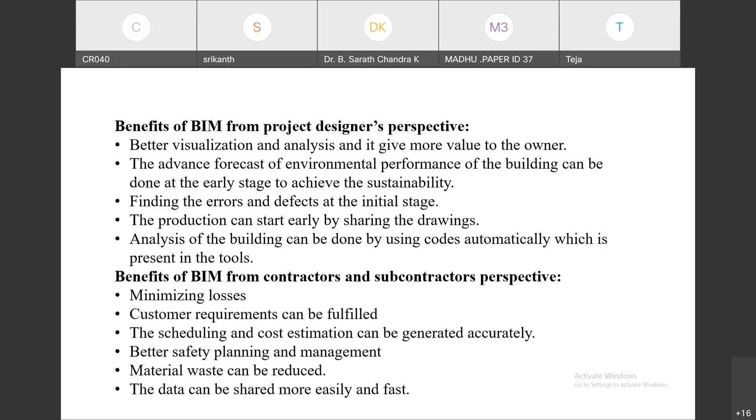Coming to the barriers to implementation of BIM, although there are many, these barriers can change from country to country and also from industry to industry. These are some of the main crucial barriers for the implementation of BIM.

This has been taken from previous literature reviews, and I grouped these into 5 major groups: initial cost, cultural issue, legal issues, lack of skilled persons, and management issues.

Coming to initial cost, there is a high cost of software, high cost of training, and high cost of the implementation process. Coming to cultural issues, there is resistance to change and lack of cooperation between the project elements.

Coming to legal issues, there is a lack of protection for intellectual property rights, lack of BIM standards, and lack of insurance applicable to BIM implementation.

Coming to lack of skilled persons, there is a lack of professional management, negative attitude towards BIM sharing, some misunderstandings about BIM, and a lack of support from the management side.

Coming to the concept of lean construction, the main aim of lean is reducing the waste and giving value to the customer.

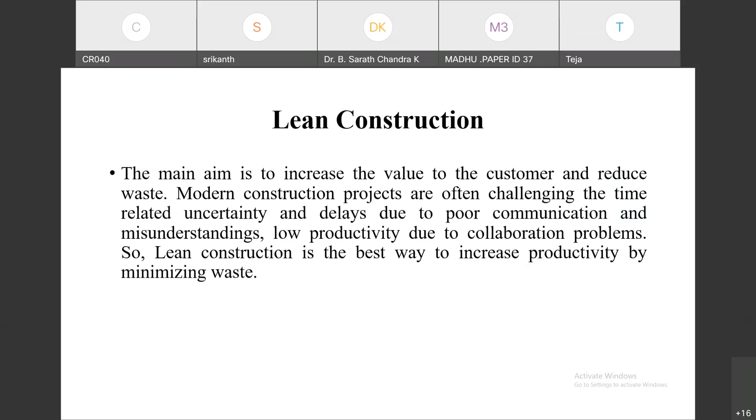In modern construction projects, there are often challenges with time-related uncertainties due to poor communication, misunderstanding, and low productivity, which happen due to collaboration problems. To overcome these collaboration problems, there is a best technique in lean construction called the last planner system.

In the last planner system, we prepare schedules like master schedule, phase schedule, look ahead schedule, weekly schedule, and daily schedule. This last planner system is also called the collaborative planning system, and the schedules are prepared only after all the constraints have been removed.

These commitments are made for when the actual work should be done each day and each week, by various specialists who are selected from the activities that are free from constraints.

Coming to the benefits of the last planner system: it increases workflow reliability, reduces the time of production, increases communication among those involved in the project, and reduces day-to-day problems. It improves the quality of work on the construction site and reduces stress levels.

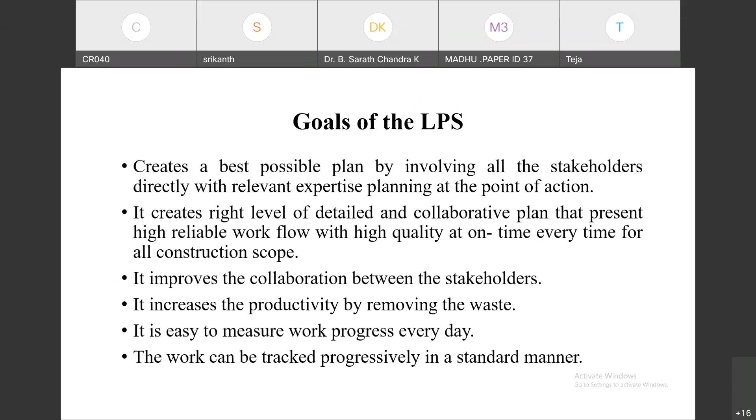Coming to the goals of LPS: it improves collaboration between the stakeholders, increases productivity by removing waste, makes it easy to measure work progress every day by calculating the PPC, and allows work to be tracked progressively in a standard manner.

Coming to the last planner system structural view, this is the structure. Firstly, the project objective has been defined, then we should plan the work. The planning involves phase schedule, look ahead schedule, weekly schedule, and daily schedules.

For every daily schedule, we calculate the PPC, that is the percentage plan completion. If the task has not been achieved, we find the reasons by using 5 why analysis, to determine why the task has not been completed.

This PPC can be calculated using this formula, that is number of completed tasks to the number of assignments. The PPC generally ranges from 0 to 100%. The lower the PPC, the planning should be done weekly. A PPC less than 100% indicates some failure in the production process, but elaborating the reasons for the failure is also important.

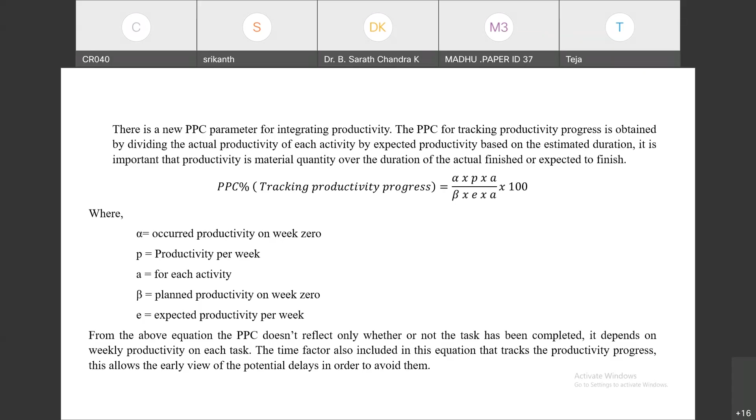Coming to the new parameter of the PPC, it includes productivity tracking. By using this, the PPC will track the productivity daily, by dividing the actual productivity of each activity by the expected productivity based on the estimated duration. This equation does not reflect only whether or not a task has been completed; it depends on the weekly productivity of each task. The time factor is also included, so it tracks productivity progress and allows early view of potential delays in order to avoid them.

When combining BIM and the Last Planner System, it enhances the efficiency of communication among project participants, minimizes project disputes and claims, stabilizes the workflow, reduces construction process variability, reduces limits and barriers from job projects, decreases uncertainty in design and construction phases, and may improve productivity.

Coming to the discussion and conclusion: the main crucial barriers for implementation of BIM are initial cost, cultural issues, legal issues, lack of skilled persons, and management issues. These barriers can be avoided by following certain measures.

Cultural issues can be solved when stakeholders and companies visit real-time implementations of BIM, so that they become willing to do their projects using BIM, by organizing several meetings and active site visits in real time. This gives some knowledge about it, and there is a decrease in the lack of skilled persons.

Legal issues are complex and have a unique response for every project depending upon participant needs. To avoid these copyright issues, the best solution is to set a contract document defining ownership rights and responsibilities. If stakeholders share data with each other and have a positive attitude towards BIM, it may avoid management issues. The main important issue is the initial cost.

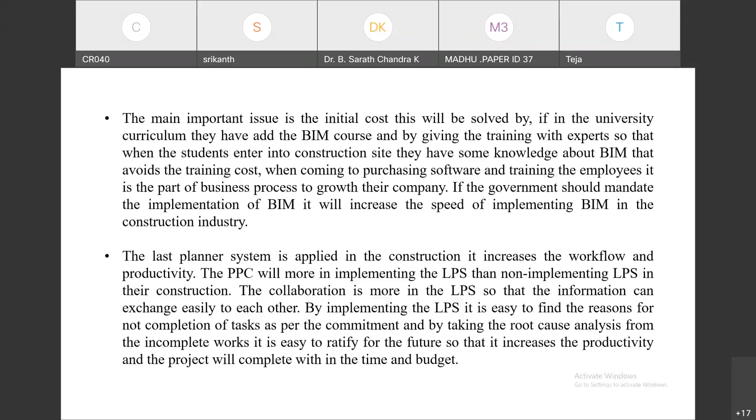By implementing LPS, it is easy to find the reasons for not completing a task as per commitments, by taking root cause analysis. It is easy to rectify for the future, so that it increases productivity and the project is completed within time. These are some of the references which I followed. Thank you.

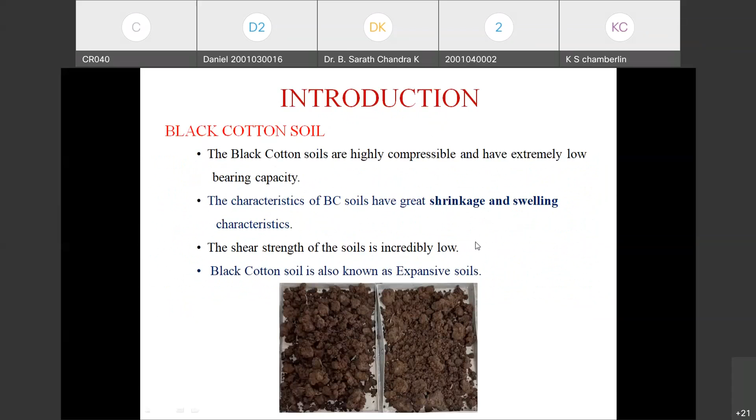This is the introduction about black cotton soil. Black cotton soil is also known as expansive soil. The characteristics of black cotton soil are great shrinkage and swelling characteristics. It has extremely low bearing capacity.

Expansive soils are soils that swell with the addition of water and shrink when dried out. These continuous changes in volume, as settlement, swelling and shrinkage properties, are mainly due to montmorillonite. This process causes serious problems with regard to subsequent performance of the road. Moreover, the soft subgrade has a tendency to heave into the upper layers of the pavement, especially when the subgrade layers consist of stony soil with lots of voids. The physical properties of black cotton soil vary from place to place, and these are some of the black cotton soil properties.

Next one is fly ash. Fly ash has also been used in embankments, pavements and mine fills, and it has increasingly gained acceptance by the Federal Highway Administration. There are two types of fly ash, Class C and Class F.

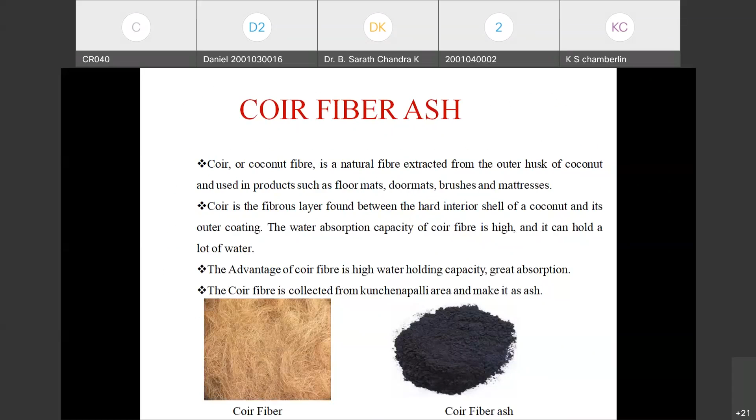Next one is coir fiber ash. Coir fiber is the layer found between the hard internal shell of the coconut and its outer coating. The water absorption capacity of coir fiber is high and it can hold a lot of water. The advantage of coir fiber is high water holding capacity and great absorption. It is collected from near Kunchenapalli area and made into ash.

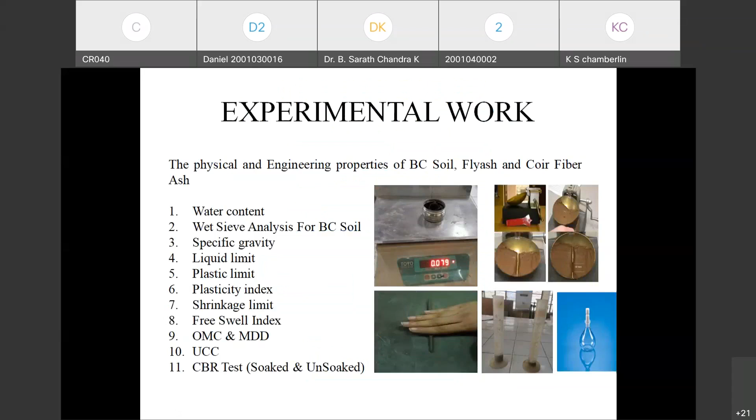First is water content, sieve analysis for BC soil, specific gravity, liquid limit, plastic limit, plasticity index, shrinkage limit, free swell index, OMC and MDD, UCS and CBR test.

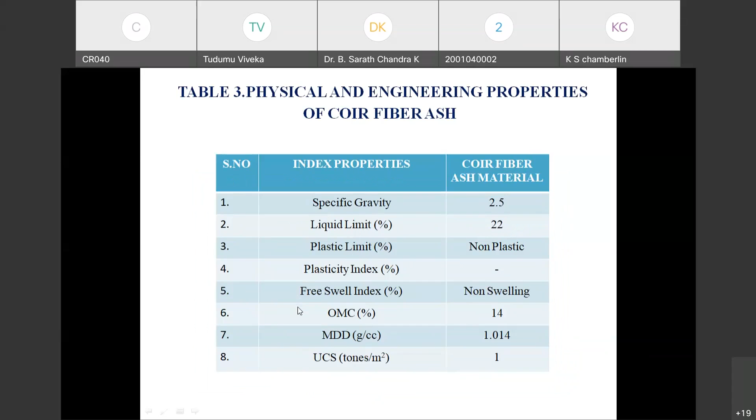And this is the geotechnical properties of the coir fiber ash. Specific gravity is 2.5, liquid limit is 22%, no plastic limit, free swell index is non-swelling, OMC is 14%, MDD is 1.014, UCS is 1 ton per meter square.

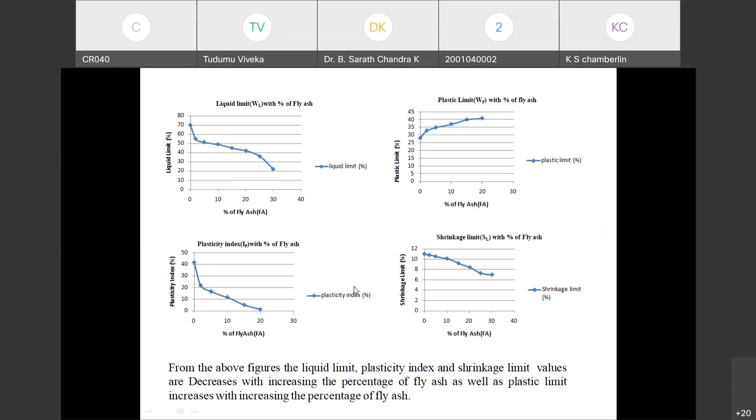These are the graphs from the table. From the above figures, the liquid limit, plasticity index, and shrinkage limit values decrease with increasing percentage of fly ash, while the plastic limit increases with increasing percentage of fly ash.

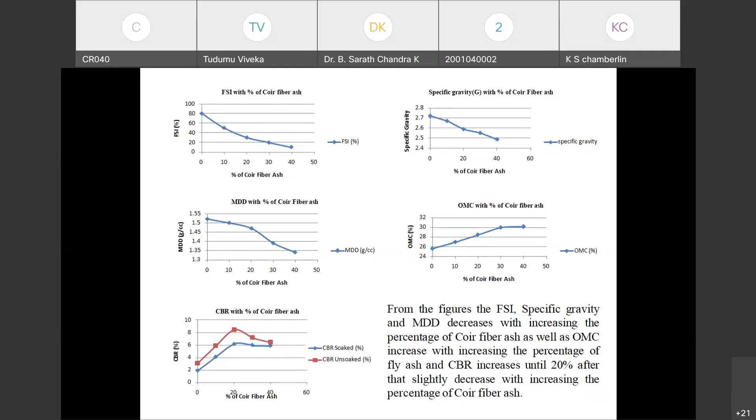From the slide, the FSI, specific gravity, and maximum dry density decrease with increasing percentage of coir fiber ash, while OMC increases with increasing percentage of fly ash, and CBR increases until 20%. After that, it slightly decreases with increasing percentage of the coir fiber ash.

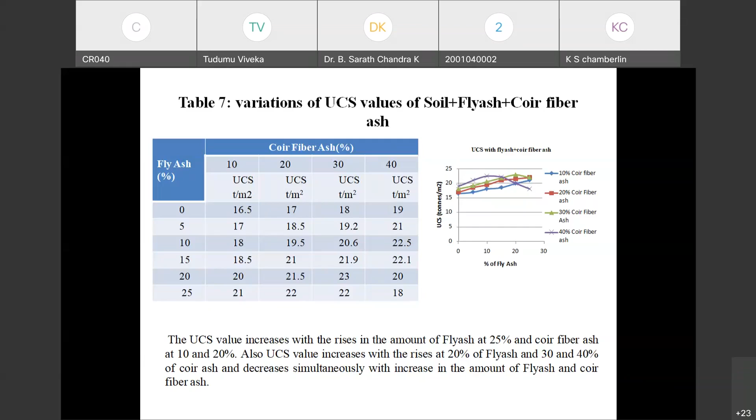Next is the variation of the UCS of the soil plus fly ash plus coir fiber ash with different percentages. From this graph, the UCS value increases with the rise in the amount of fly ash at 25% and coir fiber ash at 10 and 20%. The UCS value increases with a rise at 20% of fly ash and 30 and 40% of coir ash, and it decreases simultaneously with increasing the amount of additives.

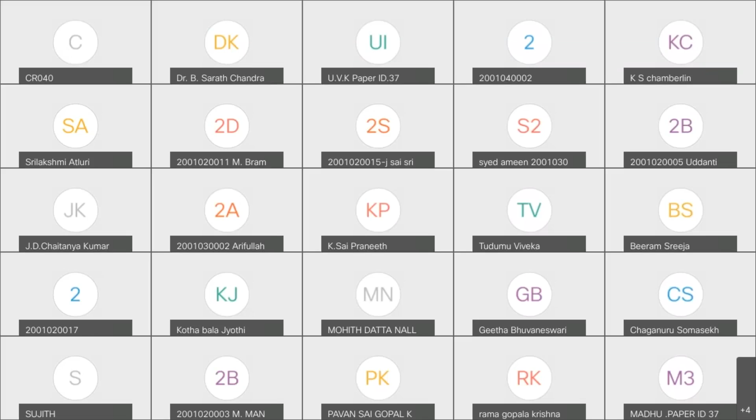Madhu, it's 2:40 now, within 2:45 you have to finish, otherwise it will be difficult for other participants to finish the presentation within the time.

Okay sir, is my screen visible sir? Visible, please continue. Okay sir.

Good afternoon sir. Today my topic is delay analysis of road construction projects from contractors, consultant, and engineers perspective. My name is V. Madhu, and I am doing my project under the guidance of Sri Lakshmi ma'am.

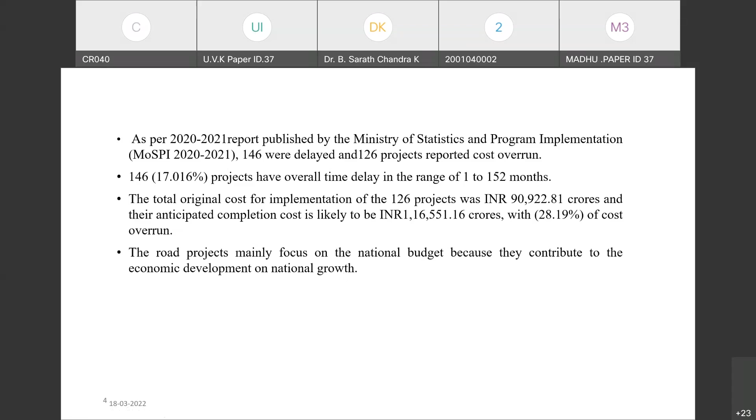So the categorization of delays. Delays are basically classified into 4 types: critical or non-critical, excusable or non-excusable, compensable or non-compensable, and concurrent or non-concurrent delays. So this is the problem statement.

So these are the literature reviews which I had referred.

The main objective of this paper is to identify the delays and test agreement ranking by the relative importance method of analysis, to study the comparison between all 3 perspectives, and to identify the top 5 causes of delays in road construction projects.

This is the methodology. First, after referring to the literature reviews, I had conducted... it's okay, skip this methodology, go to the results.

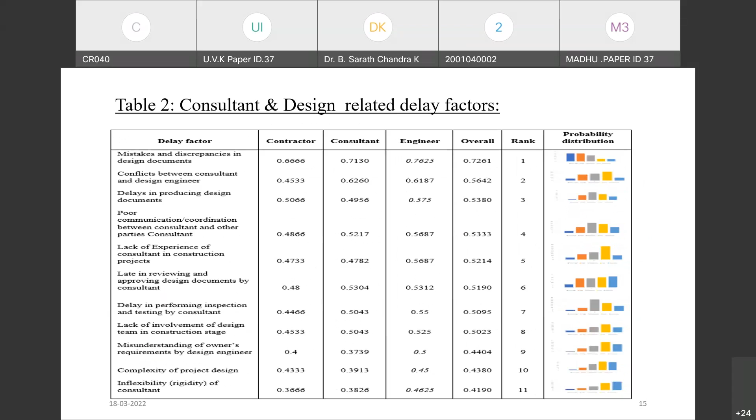So these are the results from each categorization of the group: contractor related groups, consultant and design related groups, manpower related groups, owner related groups, material and equipment related groups, project group related factors, and the external group.

These are the factors referred from each group - contractor, consultant, engineer, and the combined point of view. I took the probability distribution of how much each factor causes impact on the construction project delay, and represented it in a graphical table.

So these are the top 10 delay factors which I identified from the overall 51 delay factors, with relative important index values of 0.74 from contractor and from each perspective.

These delays can be minimized by detailed scientific investigations and providing fair compensation based on market values of specification, careful monitoring and regular meetings, use of sophisticated software for planning and scheduling like Primavera, maintaining continuous site supervision and regularly updating the schedule to avoid delays from contractors, and maintaining regular periodic maintenance of equipment to reduce equipment delays.

Collaborative working and effective coordination - BIM can be used for collaborative working, with full commitment to the project by all aspects. Contractors must be given their progress payments on a regular basis for work progression, and the owner, consultant, and contractors are recommended to improve communication and coordination with each other.

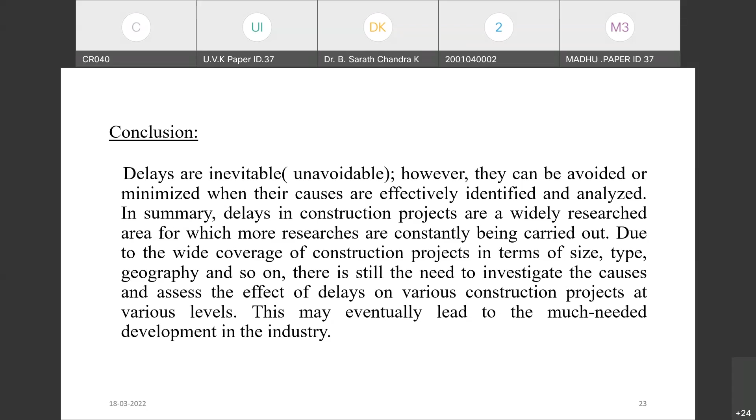These are the references. Thank you.

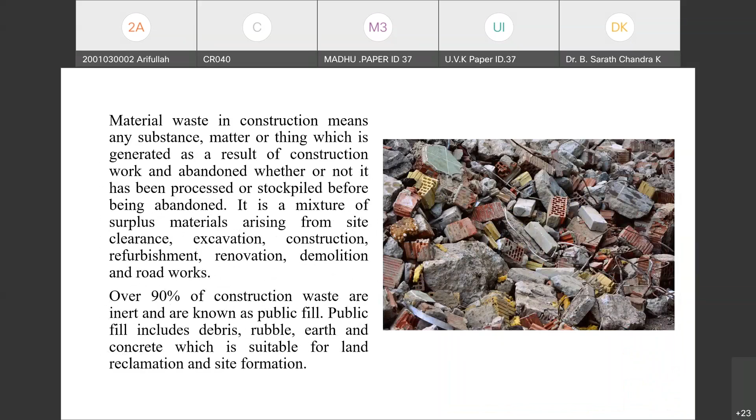So this is material waste. Material waste in construction means any substance, matter, or thing which is generated as a result of construction work and abandoned, whether or not it has been processed or stockpiled before being abandoned.

So this is my literature review, sir. My project is about finding the causes of redoing of work and material waste, and how to examine the impact of redoing of work on material waste.

So this is my methodology, sir. I have used SPSS software. The software is used to find the means and rank.

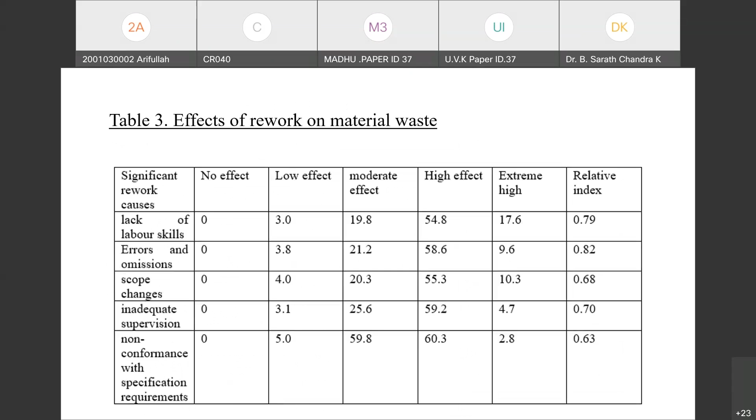So this is my data analysis. I have also found the eigenvalues, and eigenvalues more than 1.0 are considered major rework causes. These are my tables about rework and material waste, and these are the 5 factors which lead to the major rework causes. So this is how rework affects material waste.

So this is my conclusion. As per this analysis, we can see the major construction problems in industry. The questionnaire survey is used to rank the top factors affecting rework and material waste on construction sites from contractors and consultant perspective. The study indicates the top 5 factors affecting rework are errors and omissions, lack of labor skills, non-conformance with specification requirements, inadequate supervision, and scope changes. These reasons should be considered and prevented to minimize rework and material waste. It also helps to minimize the completion time and overrun cost in the projects.

Outline of the topics is the introduction, literature review, objectives, methodology, results and discussion, conclusion, and references.

Introduction of pre-engineered building. Pre-engineered building systems are components manufactured in a factory and assembled at the site as steel structures. It will be constructed very easily and is easy to construct. The manufacturing process is very easy, and the time taken in the process is greatly reduced. This is used for the pre-engineered building system.

Applications of PEB structures: it will be used for different structures like industrial factories, workshops, warehouses, car parking sheds, cement plants, and for commercial, institutional, and agricultural purposes. This is the pre-engineered building system concept.

Comparison between the pre-engineered building system and conventional building. Conventional building means traditional, with fabrication, welding, and cutting used in this concept. Pre-engineered steel buildings are constructed using steel built-up sections, fabricated off site, and bolted connections are used in construction.

The main components—the different components used in the PEB structure.

The main objectives of this project are pre-engineering system, developing the model using the pre-engineering system, and different code books used. Dead load and live load are taken as per IS 875 part 1 and part 2. Wind loads are taken based on IS 875 part 3, used in this concept.

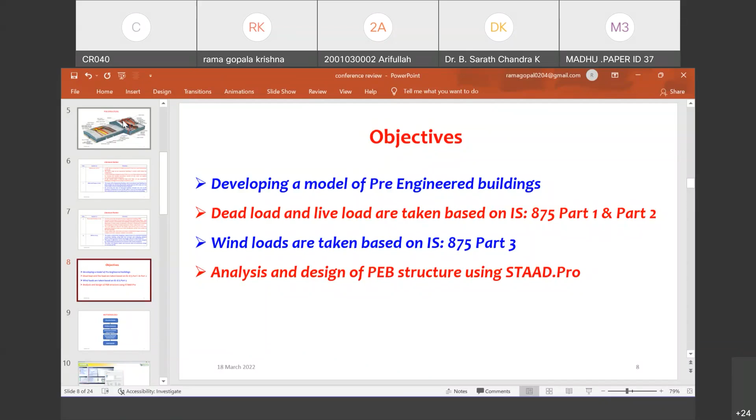I used STAAD Pro software. The methodology of the project involves literature review, problem statement, development of the model using STAAD Pro, analysis and design of the PEB structure with different loads, and conclusions.

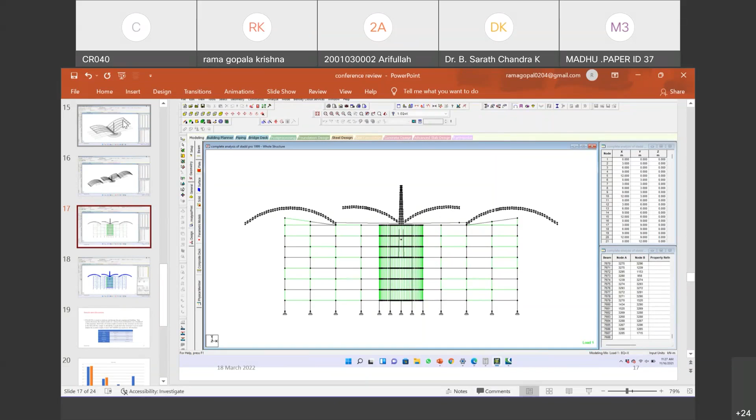Conclusion, sir, if possible. Time is going, please conclude, or else manually you can click on the slide you want. Yes, sir, okay sir.

For the conclusion, it is used for enabling the concept in this project. Tube sections and different ISMB sections are used, and the tube sections provide more advantage in reducing shear forces, so if wind forces act on the structure, they will be reduced. The tube sections handle very high forces, and Indian standard sections are used in this concept, reducing forces by a low amount. I have preferred this only from my research point of view. Tube sections are provided and are more preferable.

Thank you, sir. Thank you, Ram Gopal. Kishore Babu, are you ready now? Yes, sir, present now.

Good afternoon, everyone. This is Kishore, and I have worked on seismic response mitigation of a base isolated structure with a tuned mass damper, under the guidance of Vinod sir, assistant professor, KL University.

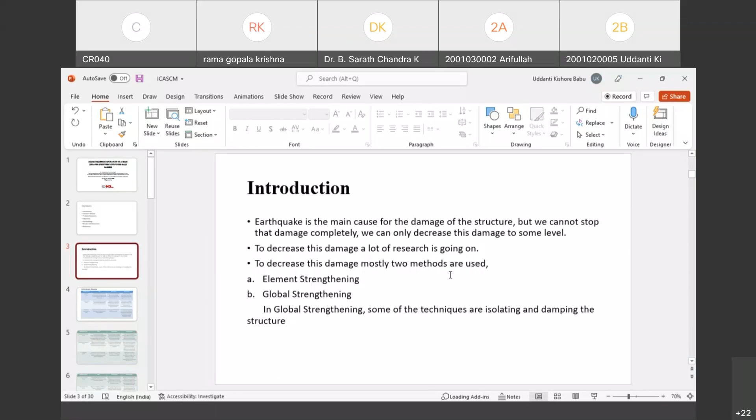Hello? Hello, Kishore. Hello, Kishore. Hello, Kishore. Sir, it is... yeah, a device.

Continuing: it is a device mounted in structures to reduce mechanical vibrations, consisting of a mass mounted on one or more isolators and a damper. Incorporating these values, we have designed the model in SAP software for the pushover analysis.

For the lead rubber bearing design procedure, the design time period must be taken as 3 times the time period we have considered here. In any bearing, the main parameter incorporated in SAP software is the stiffness of the bearing, which we have calculated and taken.

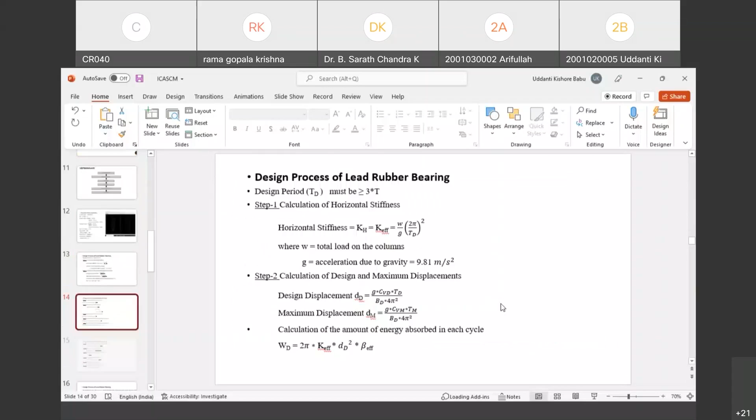Also, the shape factor is most important. The shape factor equals loaded area divided by unloaded area. These are the values we had to incorporate in SAP 2000 software. After calculating all these steps, we got these values.

For the friction pendulum bearing, coefficient of friction plays a major role. The coefficient of friction here is between the ball over the bearing and the plate.

After that, for the time period, the stiffness of the bearing is again the major factor here. After calculating all these values, we got this result incorporated in the SAP 2000 software.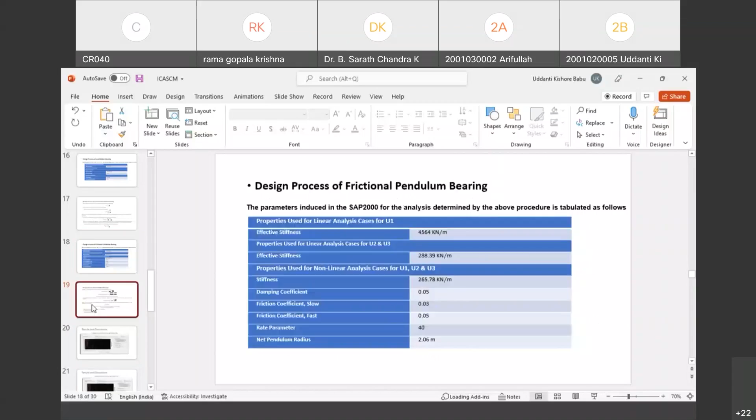We also had to design for the tuned mass damper. Here the main thing is the damper mass to main mass ratio. Previously, for the bearings, stiffness was the main parameter, but here, the damper mass to main mass ratio is the main thing.

For the tuned mass damper, it must be designed for a damper mass ratio of 5% to 10%. Here we have calculated for the 5% mass ratio, and for this we calculated the stiffness and damping values.

From these points we can tell that FPB works better than LRB, but FPB requires regular maintenance. So many people still use lead rubber bearing instead.

From here we can conclude that this combined technology may improve the seismic performance of the building, but when we incorporate both of these, the cost of the building must also be studied in future studies.

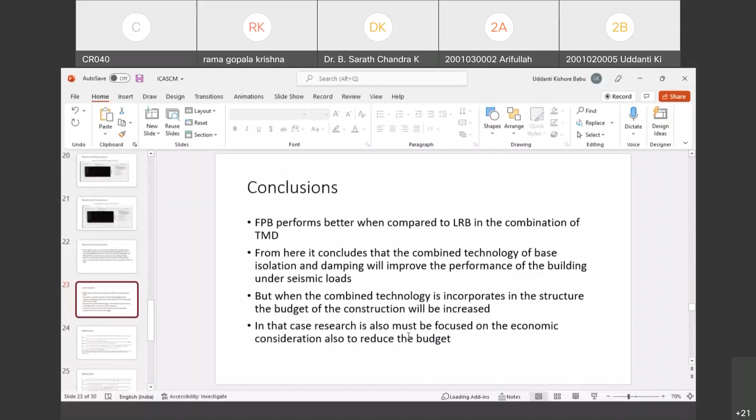And these are the references we have taken. Thank you, sir.

Okay, thank you. Sir, anything? Sarath Chandra sir? Nothing, sir, please continue. Next one, Brahmarambika Devi. Sir, yes sir, please share your screen. Only 5 minutes, ma'am, for you also. Yes, sir.

Sir, my screen is visible, sir. Yeah.

Good afternoon, everyone. My topic is strengthening of reinforced composite cement concrete beam using CFRP sheets.

These are my contents: background, introduction, objective, literature review, outcome from literature review, research program and action plan, experimental work, results and conclusion, and references.

Background of retrofitting: nowadays, retrofitting is expanding its wings in historical, public, and private important structures to increase the lifespan of the structure, to provide better economical consideration, and to provide a shelter to problems rather than replacement of the structure. It is one of the best options to make an existing inadequate building safe against future probable earthquakes or other environmental forces. Retrofitting is the process of adding new features to old buildings, heritage structures, bridges, etc. Retrofitting reduces the vulnerability of damages of an existing structure during near future seismic activities.

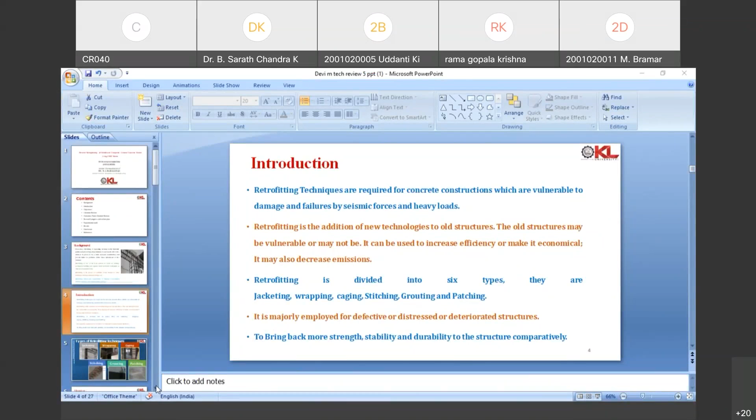These are the details of the project. Grade of concrete is M40. Number of concrete cubes is 12. Beams is 12, type of beams is control concrete beams, 4 composite beams with fly ash plus GGBS, and 4 glass fiber reinforced concrete beams. Method used is wrapping. Materials used are cement, fine aggregate, coarse aggregate, GGBS, fly ash, and glass fibers. Size of each beam is 0.15 x 0.15 x 0.17 meters. Reinforcement bars used are 4 numbers of 12 mm dia longitudinal bars, 8 mm dia stirrups at 100 mm center to center. This is my methodology.

Literature review process: collection of materials, property test of materials, M40 mix design, design of beams, casting and curing of beams and cubes, wrapping the beams after curing, testing, results, and conclusion.

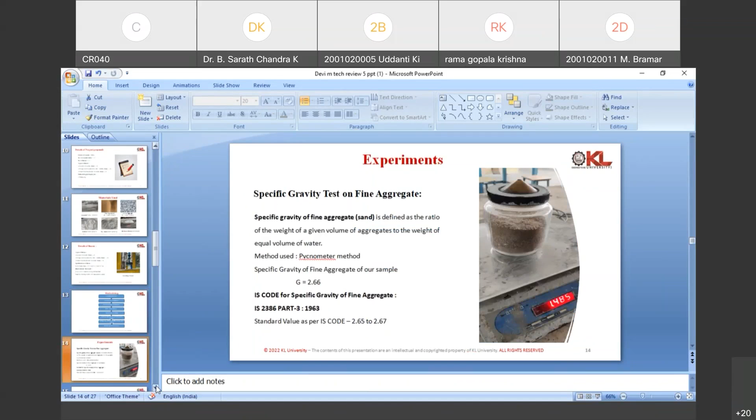These are my experimental works for fine aggregate. Specific gravity test on fine aggregate is defined as the ratio of weight of a given volume of aggregate to the weight of an equal volume of water. Specific gravity of fine aggregate is 2.66 and specific gravity of coarse aggregate is 2.97.

Mix design of concrete: grade of concrete is M40. Mix design proportion is 1:1.34:2.55. Water cement ratio is 0.35.

These are my beams while casted, mixing while curing, mixing of resin and hardener, applying epoxy to the beam, and testing in loading frame.

Results: In the control concrete beam, the failure load occurs at 53.6 kilonewtons and maximum deflection observed is 2.09 mm. The beam failed with a deep flexural crack at the center position, extending up to the compressive zone of the beam.

In the control concrete beam retrofitted with CFRP sheet, the failure load occurs at 72 kilonewtons and maximum deflection observed is 1.28 mm, and the shape of the crack is not visible due to the CFRB sheet. The flexural strength is more in the control concrete beam retrofitted with CFRB compared to the control concrete beam.

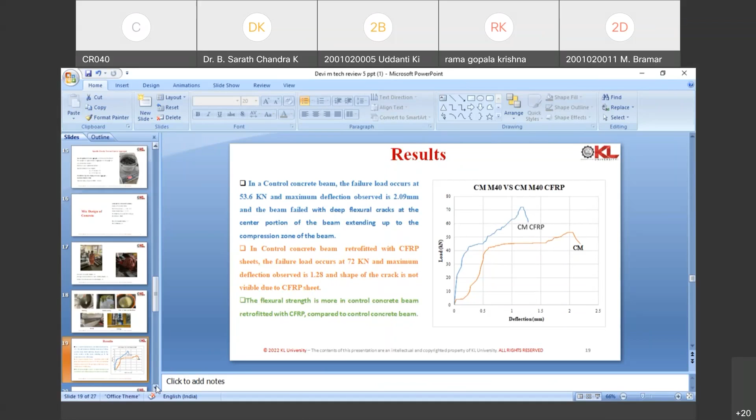In the composite concrete beam, the failure load occurs at 49 kilonewtons and maximum deflection observed is 2.05 mm, and the beam failed with a deep crack at the center position. With the composite concrete beam with CFRB sheet, the failure load occurs at 67.7 kilonewtons and deflection observed is 1.34 mm; the crack shape is not visible due to the CFRB sheet covering the beam. The composite concrete beam retrofitted with CFRB sheet gets more flexural strength compared to the composite beam.

In the glass fiber reinforced concrete beam, the flexural load occurs at 47.9 kilonewtons and maximum deflection observed is 1.92 mm, and failure occurs with a hairline flexural crack at the center position of the beam.

Brahmarambika Devi, please tell your final conclusions now. Why are you reading all those things? Sir. Okay, sir.

Conclusion: flexural strength of composite concrete beam with CFRB, control concrete beam with CFRB, and glass fiber reinforced concrete beam with CFRB is more compared to the normal beams. In deflection, composite concrete beams with CFRB sheets, control concrete beams with CFRB sheets, and glass fiber concrete beams with CFRB sheets show less deflection compared to the normal beams.

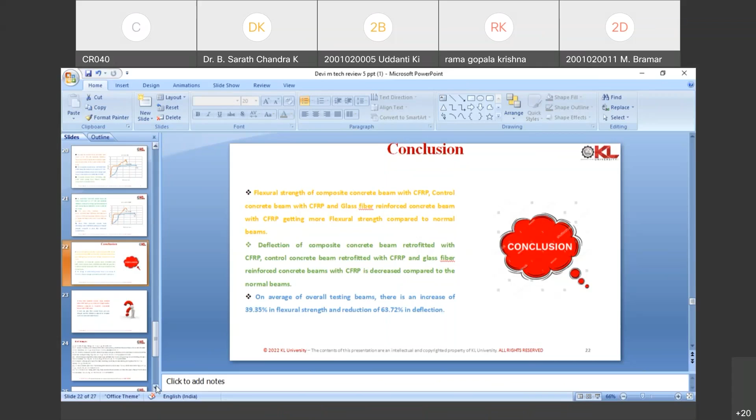On average of overall testing beams, there is an increase of 39.35% in flexural strength and a decrease of 63.72% in deflection. The glass fiber reinforced concrete beam retrofitted with CFRB sheet gets more flexural strength and less deflection compared to the composite and conventional beams with CFRB. Also, the glass fiber concrete beam gets more strength and less deflection compared to the composite and conventional concrete beams. Now these are my references.

Nice codes from Indian standards. Thank you, sir.

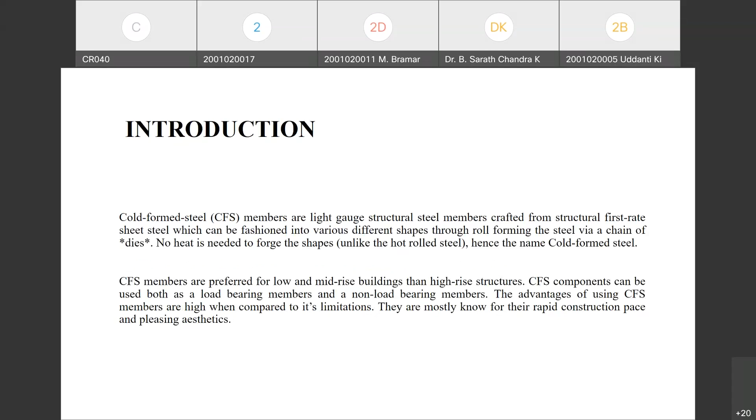CFS wall panels are made from structural steel with the help of dies. Dies are a mechanical machine tool used in manufacturing industries to cut and form material to a desired shape or profile. CFS sections are preferred for low and mid-rise buildings rather than high-rise structures.

Methodology: literature review, finite element modeling, simulation results, and conclusion. These are the specimens used, and these are the material properties. These are the models; the first model has 6 spot welds, 3 in a row and 2 in a column.

These are the load and displacement curves for Model 2, Model 3, Model 4, and Model 5.

In Model 1, the proportionality limit ends when the load is 0.37 x 10^6 newtons and the corresponding displacement is 0.1 mm. In Model 2, the proportionality limit ends when the load is 2.67 x 10^6 newtons and the corresponding displacement is 0.49.

In Model 3, the load is 0.17 x 10^6 newtons and the corresponding proportional displacement is 0.07 mm.

In Model 4, the load acts at 0.456 x 10^6 newtons and the displacement is 0.133 mm.

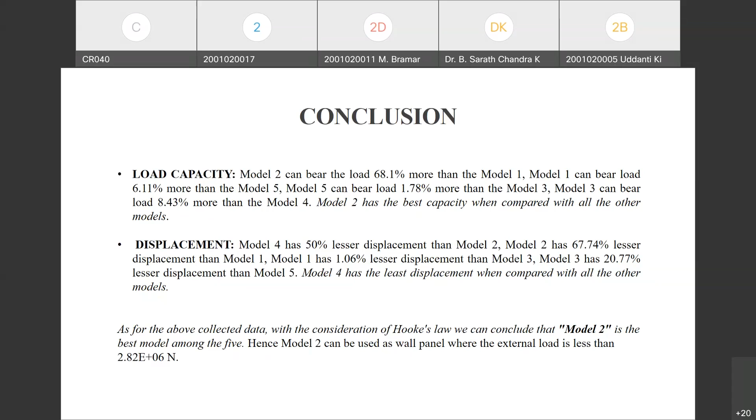By the above collected data, and considering Hooke's law, we can conclude that Model 2 is the best among the five. Hence, Model 2 can be used as a wall panel when the external load is less than 2.82 x 10^6 newtons. Thank you, sir.

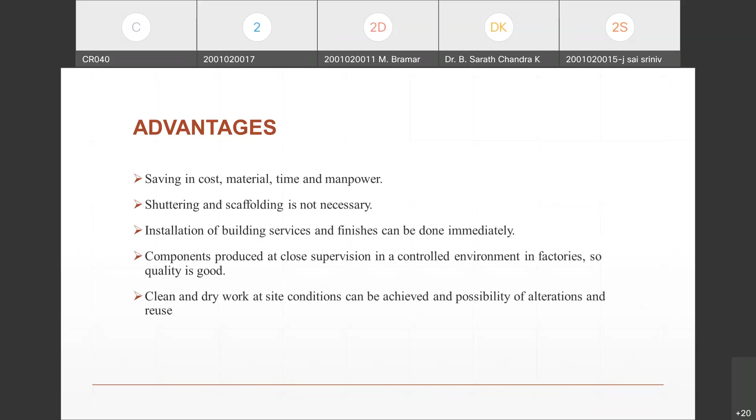So the joint and connections are important in this type of system. Some of the joints and connections are dry and mechanical connection, wet connection, and hybrid connections.

Researchers have done much work on cyclic loading, monotonic loading, impact loading, and gravity loading. Most of the work is on gravity loading, and some of the work is on cyclic loading.

In these two observations, authors made a study on the concrete damage plasticity index, which is used to capture the non-linearities of concrete in developing an FE model.

The main objective of our study is developing an FEM model, and investigation needs to be conducted on different failure modes of the connection for gravity loading conditions. The study will help identify parameters that influence the connections, by which we can improve the performance of the connections, and these performances are compared with monolithic frames.

The methodology: first, before developing an FEM model, we should calculate the concrete damage plasticity, which plays an important role in capturing the non-linearities of the concrete, as it allows... Please, we are running out of time.

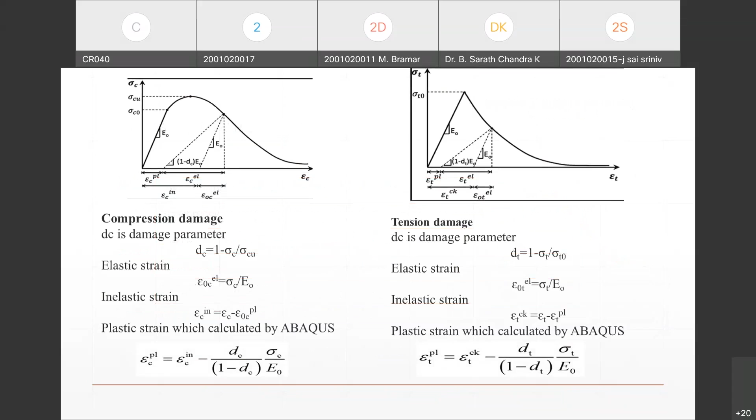In our study, an embedded region is created to attach reinforcement to concrete to develop a bond-slip effect of the reinforcement, and steel plates and bolts are used with surface-to-surface contact to the concrete to improve the concrete action, and rigid sections are developed for the reference point in order to apply loads and boundary conditions.

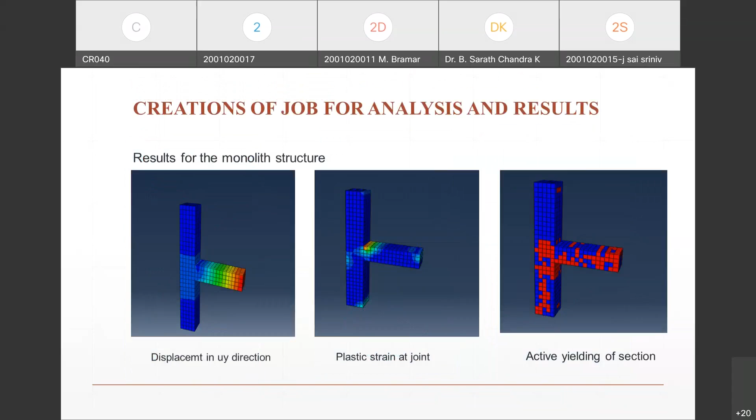First is the displacement in the y direction and negative y direction, plastic strain at the joint, and active yield of the section. From the observations on the monolithic structure, it is considered that a 10 kilonewton load was applied at the beam end with a linear increment. Failure of this section occurred at 7 kilonewton at a minimum displacement of 1.8 mm.

Yielding of the section started at 2.4 kilonewton at the 10th increment. These are the observations formed from the monolithic section.

By considering this as a benchmark, we are developing a precast segment and analyzing it, conducting a parametric study on this section. By this, we can develop a reliable and most realistic FEM model in precast segments, which will help in further investigations of the studies.

Good afternoon, sir. My topic is numerical modeling and analysis of structural behavior of cold formed steel composite wall panels under axial loading, under the guidance of Himath Kumar, sir.

Coming to introduction, cold formed steel is a common term for steel product shaped by a cold working process, which can be made by rolling, pressing, stamping, bending, etc. Generally in steel there are two types: cold formed steel and hot rolled steel. In case of hot rolled steel, we make products using welding techniques which require heat, but in case of cold formed steel, this can be made by means of rolling and pressing.

This can be useful for modular houses, where the products are manufactured in a factory and are easy to construct on site. It has been used since 1850 in both the United States and Great Britain. Due to the lack of proper design and material information in building codes, it was very rarely used. The acceptance of cold formed steel is very limited due to this lack of proper design.

Why cold formed steel? It is very light in weight and of uniform quality. The entire sheet has uniform quality and this can be reusable. If we have constructed a building using cold formed steel, we can easily remove the components and replace them with new ones when constructing the building, and it is very easy to construct.

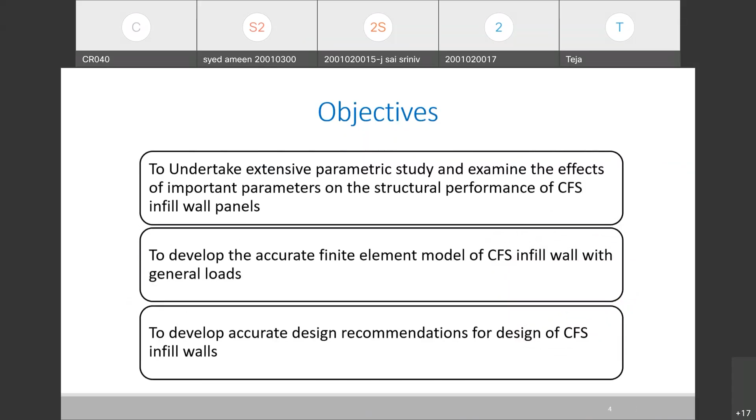It is eco-friendly. The objectives of this project are to undertake extensive parametric studies and examine the effects of important parameters on the structural performance of CFS, to develop an accurate finite element model of CFS infill with general loads, and to develop accurate design. These are the literature reviews.

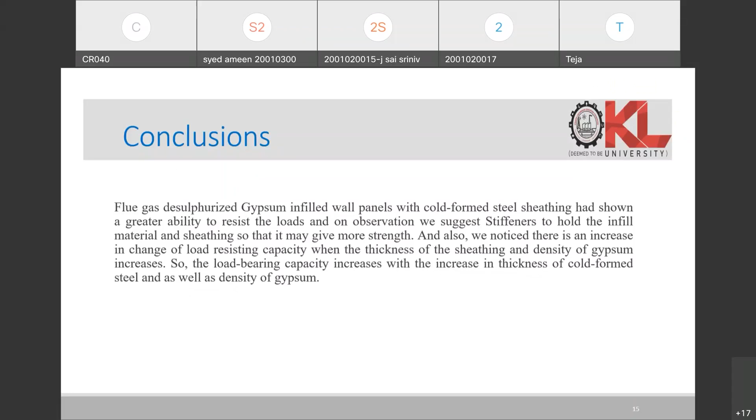I am concluding with the infill material: the infill material carries load higher than without infilling material. So the load bearing capacity increases with the increase in thickness of the cold formed steel, as well as density of gypsum. These are the references I have taken, and thank you, sir.

Yeah, thank you. The next participant, Beeram Sreeja. Sreeja, are you there? Sir, my PPT is ready. Is it visible now? Yeah, visible. I mean, Syed Ameen. Proceed. Thank you, sir. Can I start, sir? Yeah, you can start. Okay.

Good afternoon, everyone. My project is identification and analyzing risks using a chosen method in construction projects. This is the list of contents.

Introduction: risk is assumed as a deviation from the desired level, which can be positive or negative. What is the importance of risk, and why are we studying it in this paper? More than other industries, construction industries are more prone to risk and often it is not dealt with adequately, resulting in bad performance, increased cost, and time delays. Therefore, risk analysis is important for the selection of a suitable project and the coordination of construction works.

So what is the problem statement in this paper? Formal risk analysis and management techniques are rarely employed in the construction industry owing to lack of experience and knowledge in the area. The industry also holds the belief that these techniques are not suitable to be employed in construction projects in the same manner as in other industries. This perception of risk by contractors and consultants is mostly based on intuition and experience.

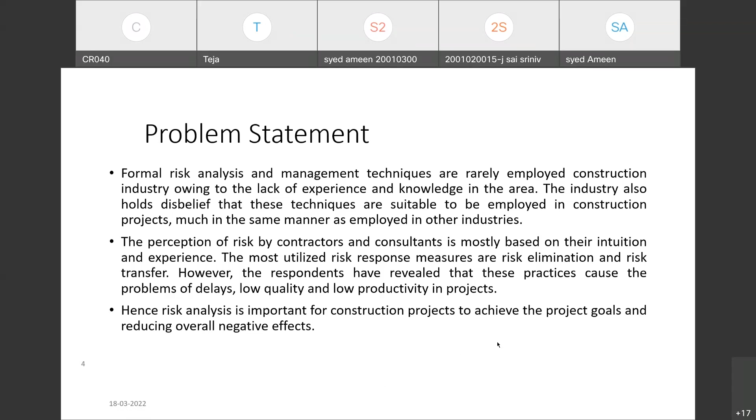What are the objectives of the study? The objective of my paper is first to identify various risks that are uncertain to occur in construction projects, then categorize those risks depending on probability and impact as high, moderate, or low. After categorizing, we do risk analysis and identify which risks are higher and which are lower.

This is the methodology. First we find the objective and scope of the project. Then from the literature review, from previous authors, we find which risks they have identified. Then we identify those risks and categorize them based on high, low, or medium. This is the methodology.

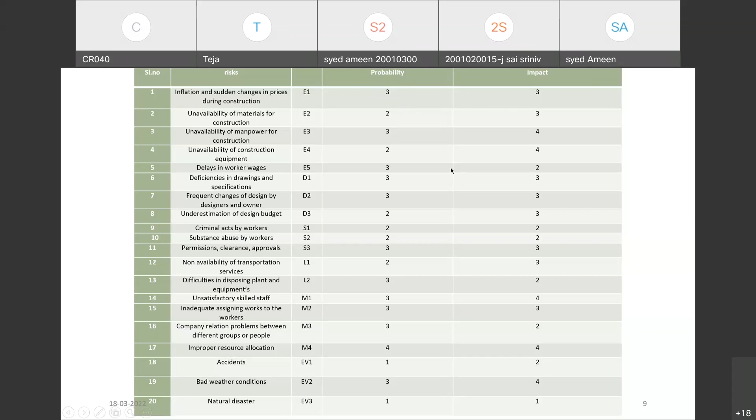This is some literature review I have taken. So I want to conclude that the top critical risks from the results were found to be improper resource allocation, bad weather conditions, unavailability of manpower for construction, and unsatisfactory skilled staff. Among them, the highest is improper resource allocation.

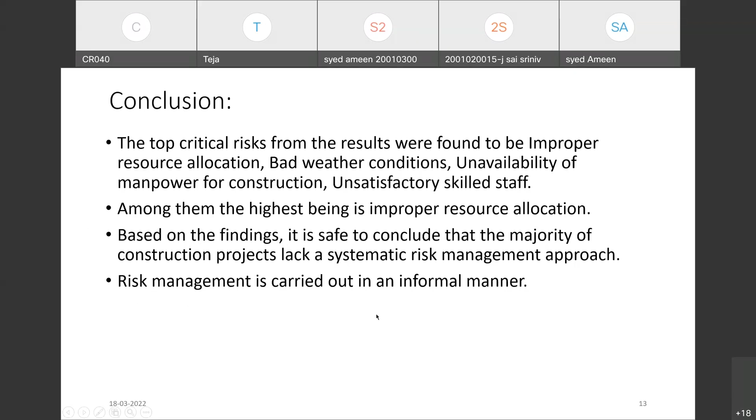Based on these findings, it is safe to conclude that the majority of construction projects lack a systematic risk management approach. There is no proper risk management approach being properly used now. We have to apply risk management in the proper day-to-day construction projects, but the risk management is carried out in an informal manner. These are some references. Thank you.

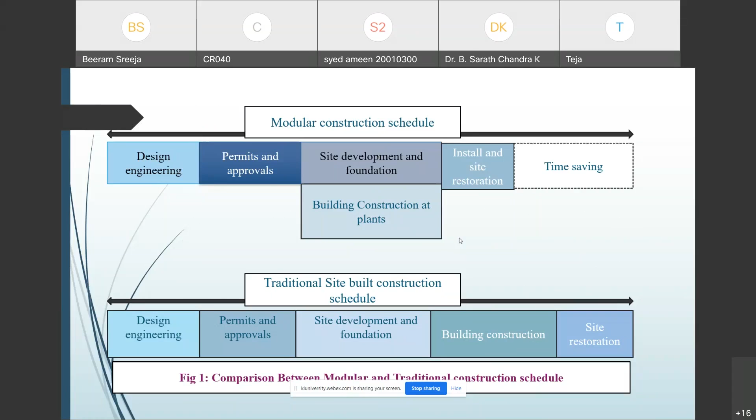comparison between modular construction schedule and traditional construction schedule. Rather than building construction at a site, we will do the building construction at plants and install the module at the construction site. By this way, we can save 30 to 50% of time, and this is the objective.

My purpose of this study is finding the suitable BIM tools and lean techniques and barriers in offsite housing construction in India. According to the survey, the barriers are being analyzed, as well as how BIM tools and lean approaches are strong in offsite housing construction. And these are some literature reviews which I referred.

Coming to methodology, I prepared questionnaires to survey, and a total of 80 responses have been collected from contractors and project managers who have experience in offsite construction. The questionnaires were sent through mails, and individual opinions were collected and evaluated using the Likert scale.

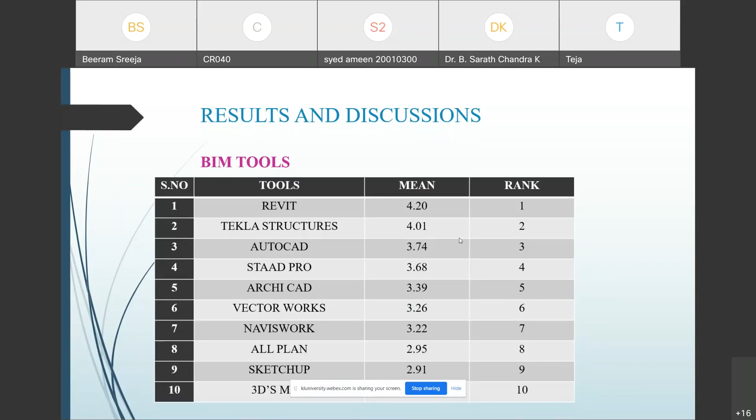Questionnaire survey: these are the BIM tools, which are Revit, Tekla Structures, AutoCAD, STAAD Pro, Archicad, Vectorworks, Navisworks, Allplan, SketchUp, and 3ds Max. This is the graphical representation of BIM tools according to the questionnaire survey which I got.

The BIM tools are Revit, Tekla Structures, and AutoCAD. These 3 are top 3, which I got according to the questionnaire survey process. Then the lean techniques are just-in-time, value stream mapping, and last planner system. These are the top 3, and these are the 3 barriers.

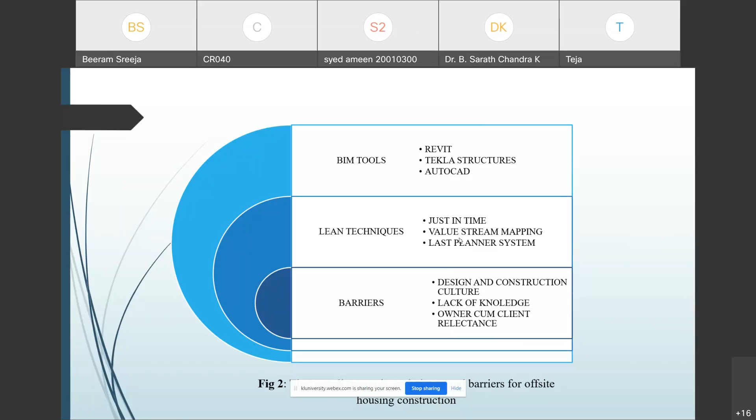Coming to the conclusion, the data collected from the respondents using the questionnaire survey was analyzed using the mean method, and among BIM tools, Revit, Tekla Structures, and AutoCAD have the highest significance value. In lean techniques, just-in-time value stream mapping and last planner system have the highest significant value and are listed top in this group. The main crucial barriers which affect offsite housing construction are design and construction culture, lack of knowledge, and owner or client reluctance.

By overcoming these barriers, it may speed up the process of implementing offsite construction and building projects by integrating lean and BIM techniques. These are the references which I referred.

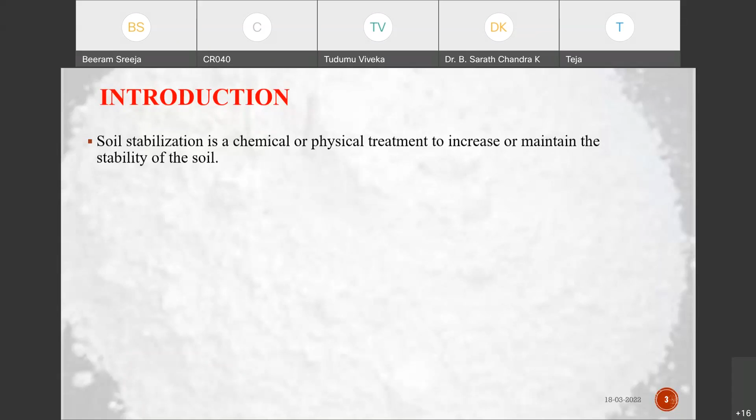To attain stability, we use different additives like fly ash, lime, and materials such as lime kiln dust, cement kiln dust, concrete fines, industrial waste such as bitumen, marble dust, granite dust, and solid waste such as rice husk ash, etc. The main project proposal focuses on marble dust, an industrial waste, and rice husk ash, a solid waste. I picked these materials because they are economical and easily available.

The rice husk ash and marble dust are collected from particular locations and mixed with soil in various proportions, like 2 to 12% RHA and 5 to 20% marble dust. Different laboratory tests were conducted for these proportions, and the optimized proportion was arrived at. These results are compared with natural soil to investigate the behavior and type of soil.

The main objective is to study the influence of waste materials such as marble dust and rice husk ash on the characteristics of black cotton soil, and to understand its behavior when mixed with these materials in various percentages. We also aim to carry out experimental analysis and observe changes in soil properties like maximum dry density, optimum moisture content, liquid limit, plastic limit, California bearing ratio, etc.

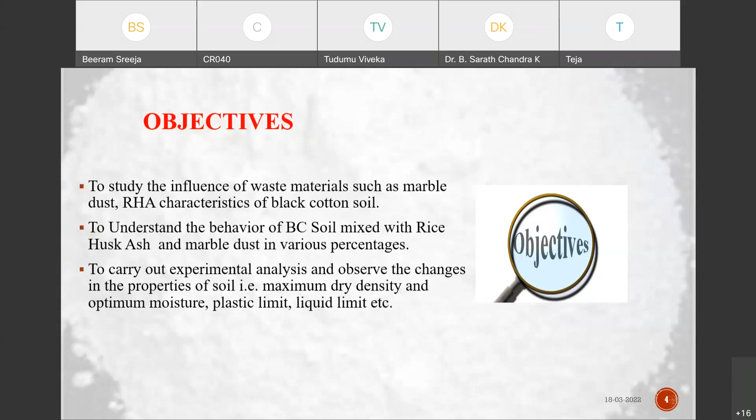The materials collected include black cotton soil, also known as expansive soil or soft soil. Black cotton soil is a clay soil varying from clay to loam, generally light to dark gray in color, and cotton is grown in this kind of soil. The other material is rice husk ash.

It has been extensively used in the past for soil improvement. In a rice farm, rice husk is a common waste product, making up around 30 to 50% of the world's food producers' waste.

And coming to marble dust, it is obtained from Viveka— sorry, can you please straight away go to your results and conclusions? Don't spend time explaining all these materials.

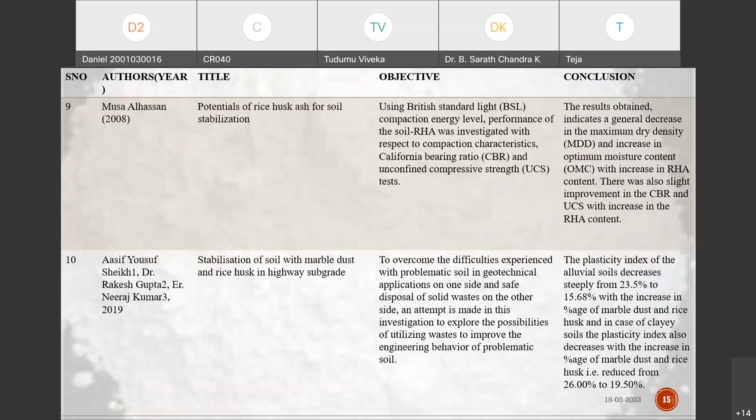This is the methodology. The experimental work used black cotton soil collected from NTPC Nunna, Vijayawada. The rice husk ash is collected from Sri Venkateshwara Rice Mill, Nunna, and the marble dust is collected from KGN Granites, Gollapudi.

These are the experimental results. For the soil, the liquid limit is 68%, plastic limit is 28%, and plasticity index is 40% for the black cotton soil. The free swell index is obtained as 40%.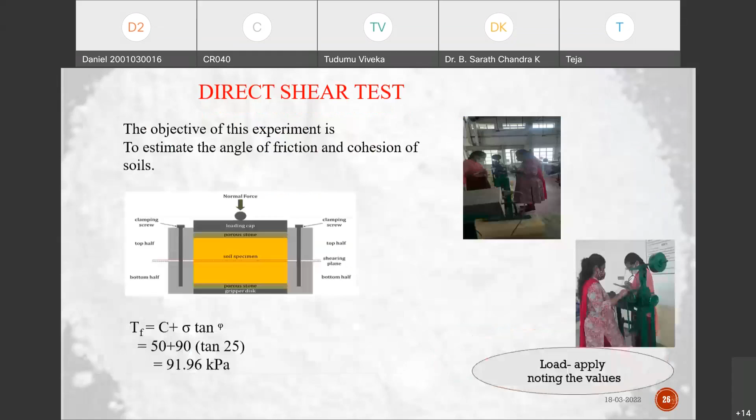This is the direct shear test and the vane shear test. The shear strength of the soil specimen obtained from the vane shear test is 0.092 kg per centimeter square.

Compaction tests include two different tests: standard Proctor and modified Proctor. These are the major differences between standard Proctor and modified Proctor.

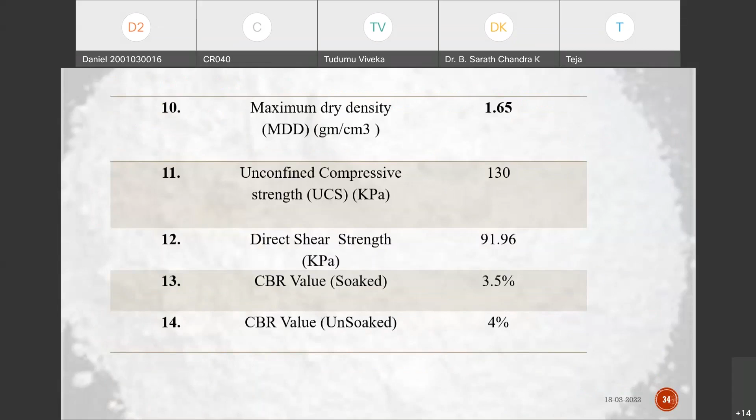Coming to the California bearing ratio, these are the results obtained for the soil. Water content is 37%, specific gravity is 2.67, followed by free swell index, optimum moisture content, maximum dry density, unconfined compressive strength, and CBR value, both soaked and unsoaked.

Rice husk ash, the properties of the rice husk ash: specific gravity is obtained as 1.93, followed by maximum dry density, optimum moisture content, angle of internal friction, and CBR soak 8.54.

If we see the results of soil plus percentage of rice husk ash, these are the values obtained for specific gravity, liquid limit, plastic limit, plasticity index, free swell index, optimum moisture content, maximum dry density, etc., with different percentages of rice husk ash and soil: 0, 2, 4, 6, 8, and 10%. So these are the results that obtained.

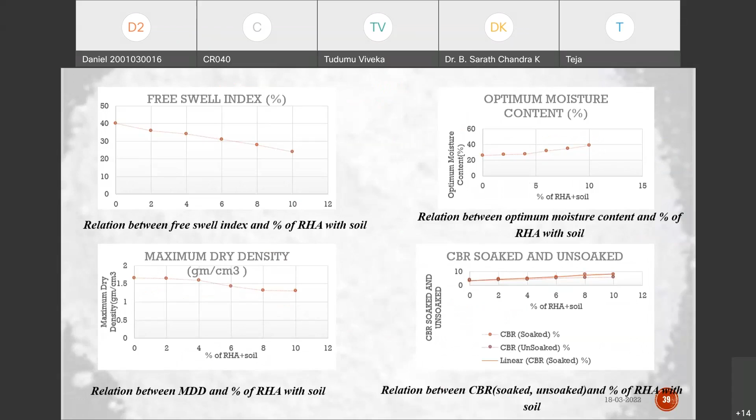If we see the graphs, the relation between specific gravity and the percentage of RHA with soil, and liquid limit, plastic limit, and plasticity index, these four are reducing with respect to the increase in the percentage of RHA. Free swell index and maximum dry density are also decreasing with the increase in RHA, while optimum moisture content and CBR are increasing with the increase in the percentage of RHA and soil.

So these are the properties of the marble dust. These are the obtained results: liquid limit, plastic limit, and other properties with 0, 5, 10, 15, 20, 25, 30, 35 percentages of marble dust.

If you see the results here, the specific gravity, free swell, plastic limit, and liquid limit are decreasing with respect to the increase in the percentage of marble dust. The optimum moisture content also decreases with the increase in marble dust percentage, while maximum dry density and CBR values increase with the increase in marble dust.

If we see the various properties of soil with respect to rice husk ash and marble dust, these are the values obtained at different percentages. And if you see the results, these are the results obtained with respect to different percentages of marble dust.

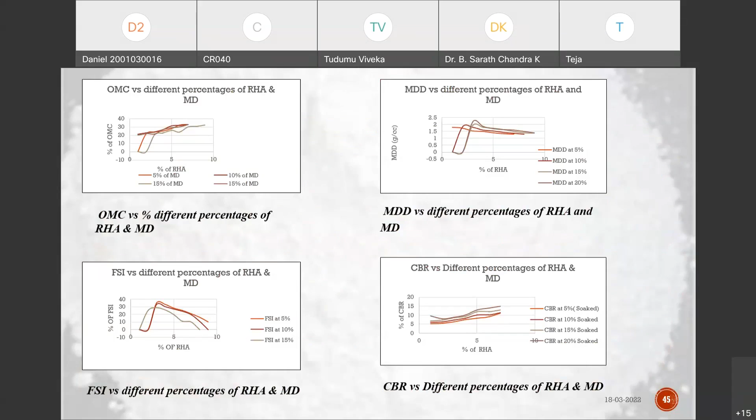Coming to the results and discussions, we can observe that the soil sample's free swell index decreases 40% up to 24% when RHA is added, and up to 14% when MD is added, which shows improvement of the swelling nature.

With rice husk ash, liquid limit, plastic limit, shrinkage limit, and plasticity index decrease, while optimum moisture content and California bearing ratio increase. In marble dust, similarly some parameters decrease while maximum dry density and California bearing ratio increase.

And we can see different results: there is a decrease in the liquid limit of soil of about 33% with addition of 35% marble dust, whereas in the case of 10% rice husk ash, the decrease in liquid limit is 48%.

It was noted that the plasticity index of the expansive soil decreased by 15% with the addition of 35% marble dust, while with RHA the decrease noticed was 23.7%. So we can see the results, which show the improvement of the soil when the additives are added.

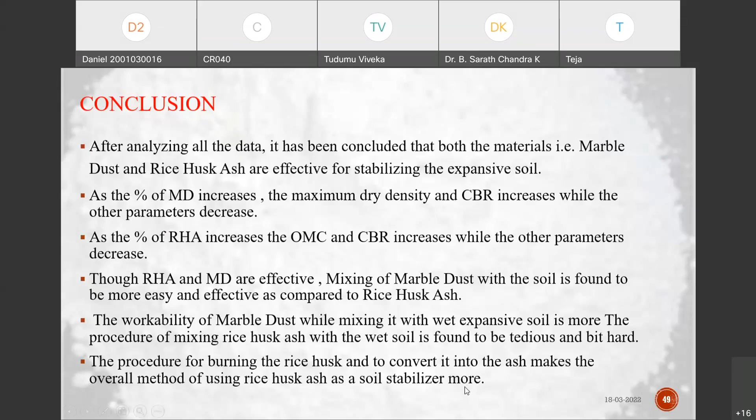Though RHA and marble dust are both effective, mixing marble dust with the soil is found to be easier compared to rice husk ash. The workability of marble dust while mixing with wet expansive soil is higher. The procedure of mixing rice husk ash with wet soil is found to be a little harder, and the procedure for burning the rice husk to convert it into ash makes the overall method of using rice husk ash as a soil stabilizer more cumbersome.

That's it. Thank you, sir.

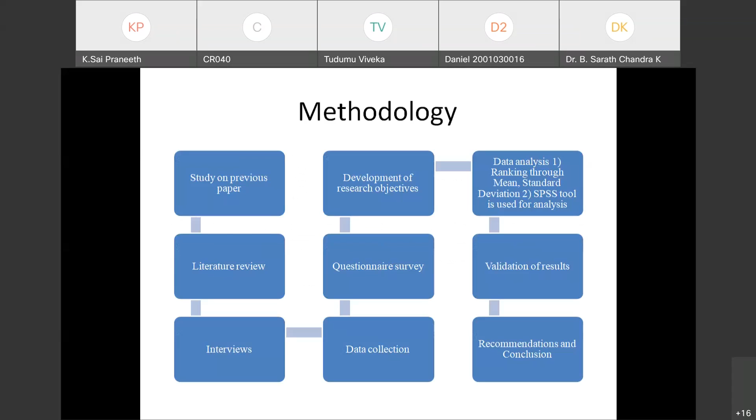Conclusion: This study has furnished the view that project control employees can use human competence, including the three human skills discussed in this research, to enhance security control in construction projects. Additionally, leadership and execution of security control duties in combination with oblique control from interpersonal skills publicize the development of a security atmosphere, which is an essential benchmark of construction security responsibilities.

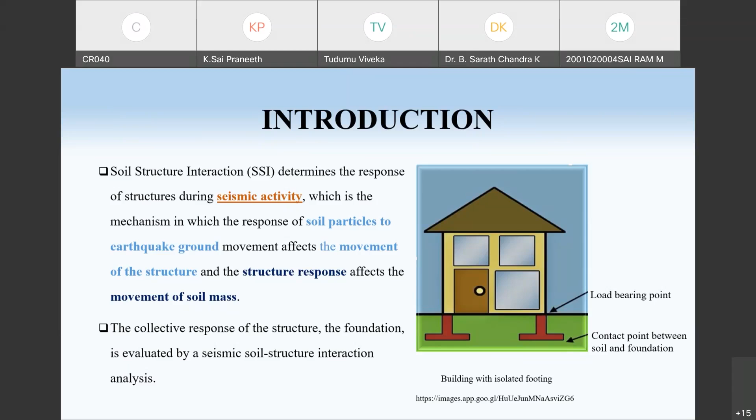Sir, contents recorded in this presentation. Coming to the introduction, soil structure interaction determines the response of the structure during seismic activity, which is the mechanism in which the response of soil particles to earthquake ground movements affects the structure, and the structural response affects the movement of the soil mass. The collective response of the structure and foundation activity is analyzed by seismic soil structure interaction.

This mainly consists of interaction between the soil and the structure built upon it, primarily an exchange of mutual stress whereby the movement of the ground-structure system is influenced by both the type of ground and the type of structure, especially applicable to areas of seismic activity. Various combinations of soil and structure can either lead to movement or significant damage in these types of soil structure interaction.

There are two types: substructure approach and direct analysis approach.

Coming to the problem statement: the traditional approach assumes the base of the building to be fixed for the estimation of the natural period, and ignores the influence of soil structure interaction. During recent decades, it has been realized that soil structure interaction effects play a major important role in determining the behavior of building structures.

In these studies, the effect of soil structure interaction may determine the seismic response of the structure, and neglecting this in the analysis may lead to unconservative design.

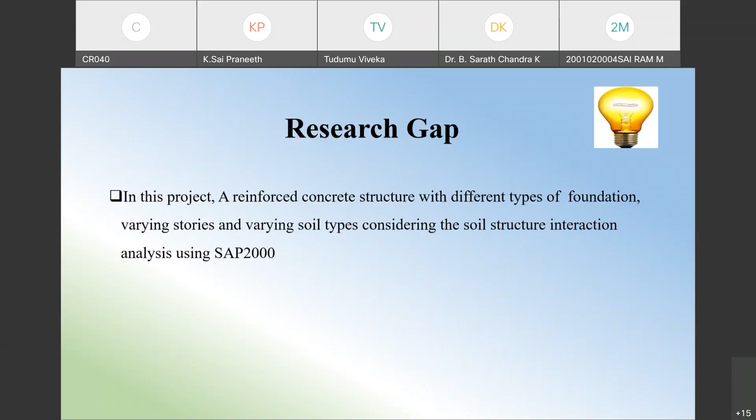Research in this project: reinforced concrete structures which have different types of foundations, varying stories, different types of soils, different types of soil structure interaction, using the software SAP 2000.

Comparative study of SSI from finite element analysis using SAP 2000. These are the analysis data of the soil.

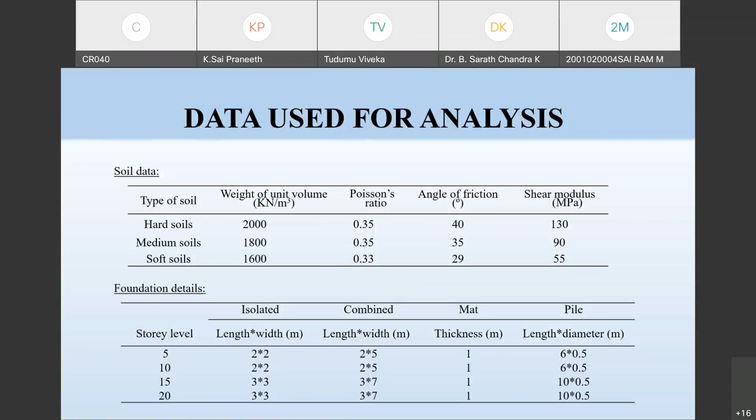In this, hard soils, medium soils, soft soils are mainly considered. These are the foundation details for 5-story, 10-story, 15-story, and 20-story buildings. In this, we take isolated, combined, mat, and pile foundations.

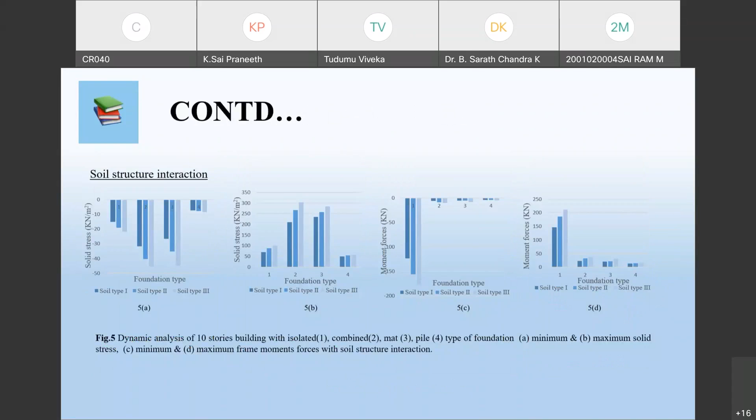It's a 5-story structure. Simultaneously, we took a graph of 10-story, 15-story, and 20-story buildings. It's a fixed base, and we did a dynamic analysis of a 10-story building with isolated combined mat pile foundation. In this soil structure interaction, with the dead load graph, it is shown.

Coming to the conclusions, RC building frame resting on soil which has lower unit weight has the highest SSI effect; highest unit weight has lower SSI effect, which occurs in the soil domain and also in the frame structure. Moments occurred in the frame structure can vary depending upon the soil and foundation system analysis.

Soil structure interaction affects the structure more compared to fixed base at the foundation. From the analysis results, it will be a minimum range of 2 to 4 times more soil structure interaction than fixed condition. When varying the foundation type for a particular structure, results differ from one type of foundation to another, depending on soil deposit and frame structure, comparing soil structure interaction and fixed condition.

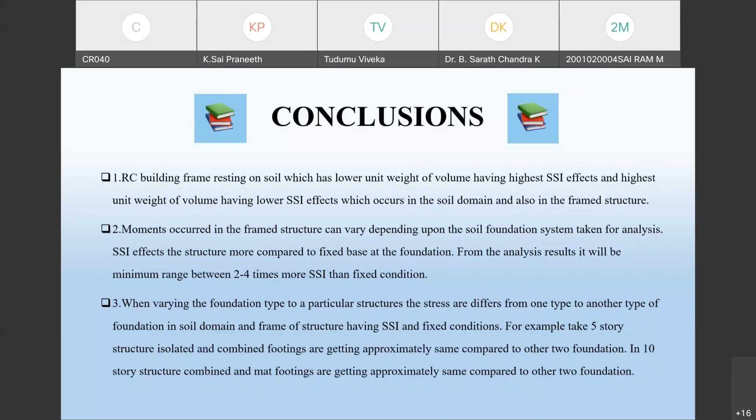For example, taking a 5-story building analysis with combined footing, it's okay, approximately we can understand. Please conclude with the non-linear model, sir.